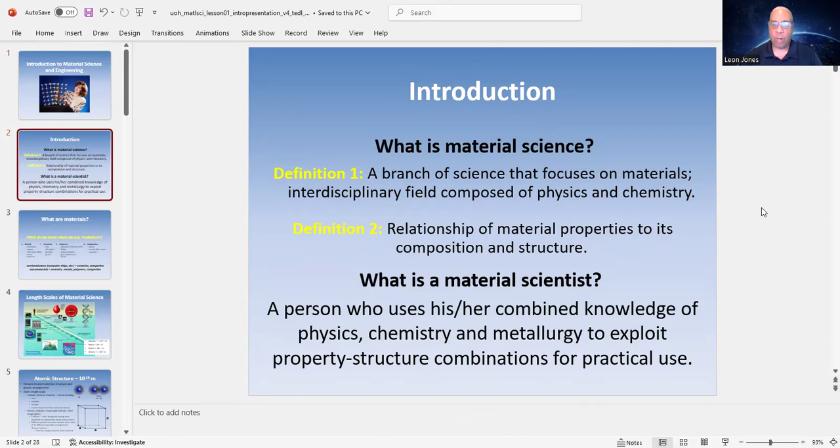To start everything off, the introduction. What is material science? It's a branch of science that focuses on materials. It's an interdisciplinary field composed of physics and chemistry, and it relates material properties to composition and structure. So what is a materials scientist? It's a person who uses his or her combined knowledge of physics, chemistry, and metallurgy to exploit property-structure combinations for practical use. Think about that.

Now, what are materials? We have a few of them. We have metals, used in mechanical engineering and civil engineering: aluminum, copper, steel or iron alloy, nickel, and titanium. We get into ceramics: clay, silica glass, alumina, and quartz. And we get into polymers. You're going to hear this term if you work in construction: polyvinyl chloride, PVC. What uses polyvinyl chloride? PVC pipe.

Then we have Teflon, various plastics. What about adhesives? Glue is an adhesive. And for individuals in combat, Kevlar helmets. Getting back to my field of civil engineering, composites: wood, carbon fiber resins, and concrete. Materials are in a number of branches of engineering, but you also have semiconductors, computer chips, which equal ceramics and composites, and nanomaterials, which equal ceramics, metals, polymers, and composites.

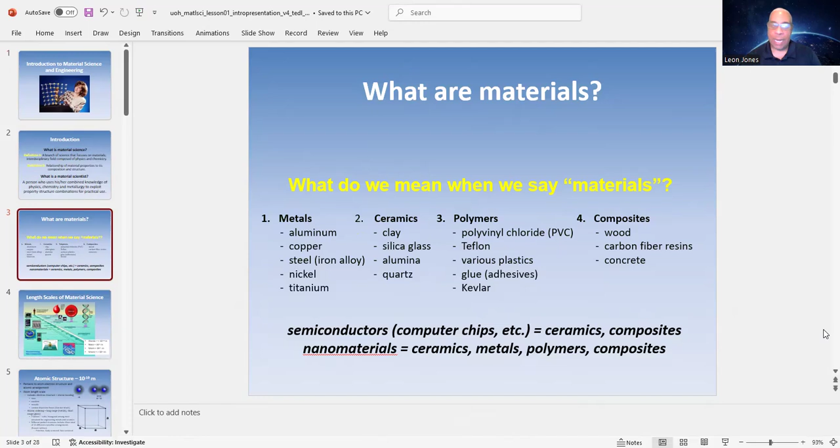So the length scales of material science. Something you need to know: atomic is less than 10 to the negative 10 meters. Nano, 10 to the negative 9 meters. Micro, 10 to the negative 6 meters. And macro, 10 to the negative 3 meters. When I say anything to a negative power, that means 1 over that number. Like 10 to the negative 3 is 1 over 1,000.

As you look at what's in materials, you have atomic handwriting, a bio motor, nanoshells, a quantum corral, nanostructure, a medication delivery system, a nerve chip. You have a man standing 6 feet tall. Then you have your DNA, a helix, and your blood cell. This is what materials are tied to.

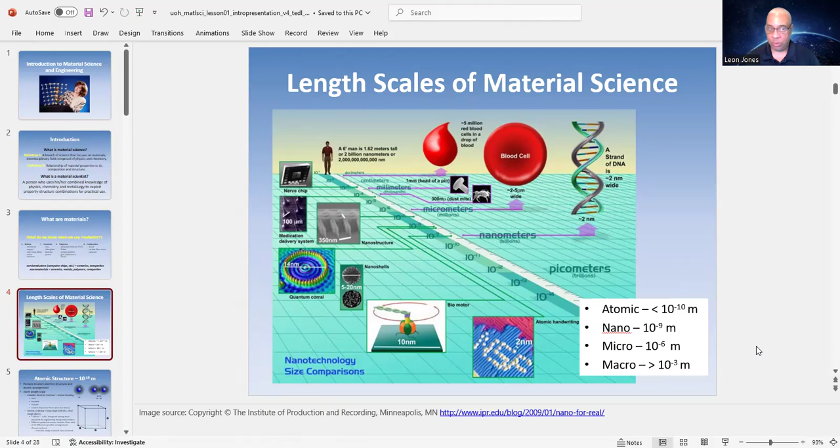Very, very small. Now, when we talk about our atomic structure, we're talking about 10 to the minus 10. It pertains to atom electron structure and atomic arrangement. Atomic length scale, which includes electron structure and atomic bonding. So this is what I mentioned earlier. You have your ionic, your covalent, your metallic, and your London dispersion forces, which is van der

Waals. Then you have your atomic ordering: long-range, metals; short-range, glass. We have 7 lattices, cubic and hexagonal among the most prevalent for engineering metals and ceramics. Then you have different packing structures, and the inclusion gives you a total of 14 different crystalline arrangements, your Bravais lattices, your primitive, your body-centered, and face-centered.

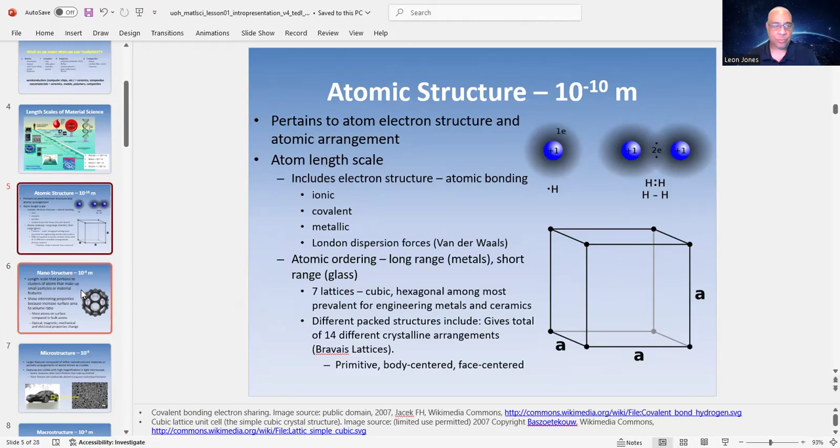And this is where you start getting into your chemistry right here. This is right here, 1e. What is 1e? It means it's 1 electron. 2e, 2 electrons. We get into the 10 to the negative ninth length scale that pertains to clusters of atoms that make up small particles or material features. They show interesting properties because of the increase in surface area to volume ratio. So what happens is you have more atoms on the surface compared to bulk atoms.

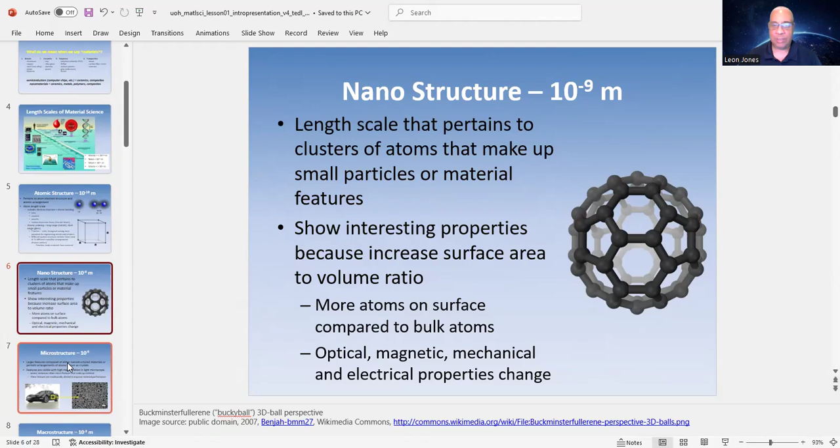And then we start to get into things you see with your eyes. We deal with optical, magnetic, mechanical, and electrical property changes. And this is under the nanostructure. Then we have your microstructure, 10 to the negative 6. Larger features composed of either nanostructured materials or periodic arrangements of atoms known as crystals. Features are visible with high magnification in a light microscope.

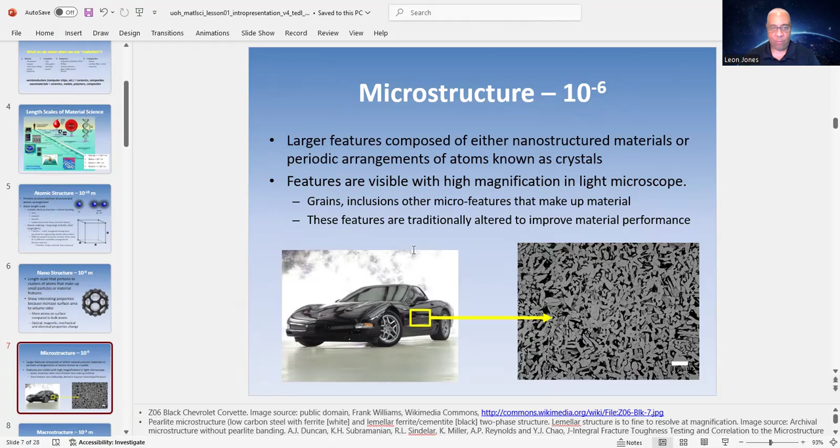Grains, inclusions, other microfeatures that make up the materials. These features are traditionally altered to improve performance. You find that in cars. You'll see that you'll have it in this car. Then we have our macrostructure, 10 to the negative third, which pertains to collective features on the microstructure level. Grain flow, cracks, porosity are all examples of macrostructure features. Now, where's another place that you see the word porosity? Well, you see it in fluids and you also see it in soils.

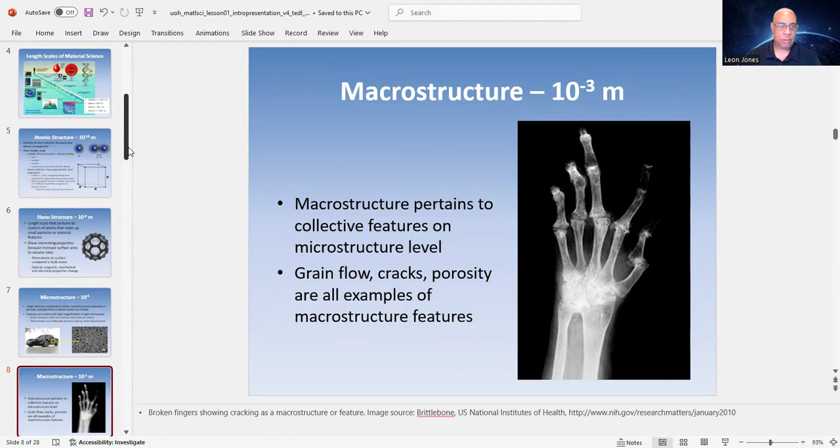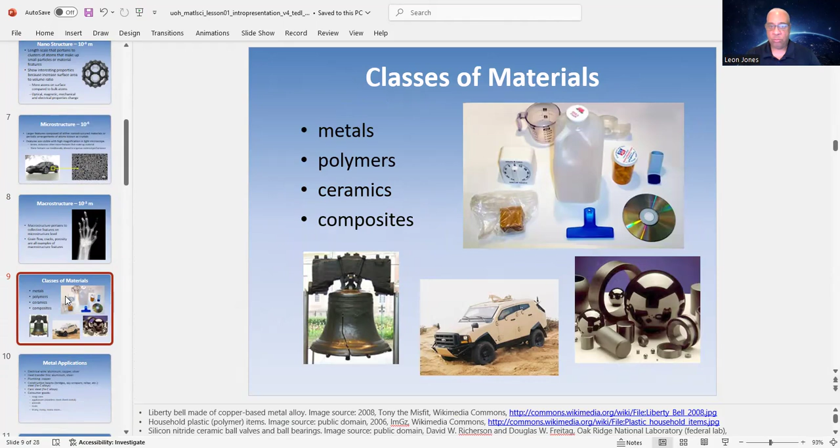Then we have all that. Let's get into the classes of materials. We have your metals, your polymers, your ceramics, and your composites. And again, these materials are used for everyday items that we use, like milk cartons, scales, cars. And we have our material applications: electrical wire, aluminum, copper, silver; heat transfer fins, aluminum, silver; plumbing, copper; construction beams used for bridges, skyscrapers, rebar, etc.

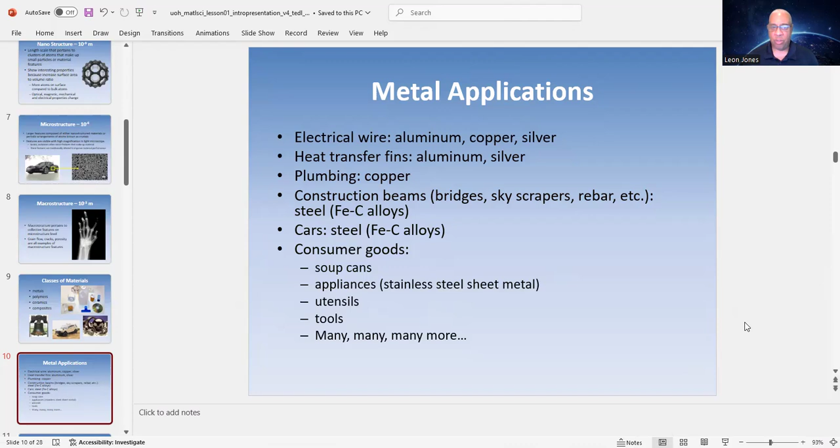Steel, Fe-C alloys; cars, steel, Fe-C alloys; consumer goods, soup cans, appliances, stainless steel sheet metal, utensils, tools, and of course, many more. And for the metals, metals consist of alkaline earth, metalloids, and transition metals. So basically, metal alloys are mixtures of 2 or more metal and non-metal elements. For example, aluminum and copper, copper and nickel, alloy steel.

We have our bonding, metallic bonding. No particular sharing or donating occurs. An electron cloud is formed, that is, free electrons. Strong bonds with no hybridization or directionality. Then you have your properties. Electrically conductive, free electrons; thermally conductive; high strength, large capacity to carry load over cross-sectional area. You deal with stress. Ductile, endures large amounts of deformation before breaking.

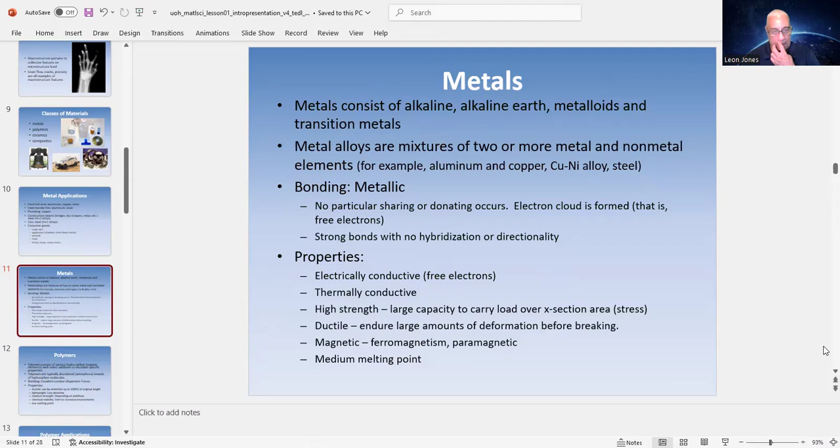Then we have magnetic, ferromagnetism and paramagnetic. Then we deal with the medium melting point. Polymers consist of various hydrocarbon organic elements with select additives to elucidate specific properties. Polymers are typically disordered, amorphous strands of hydrocarbon molecules. Bonding: covalent, London dispersion forces, and we have our properties.

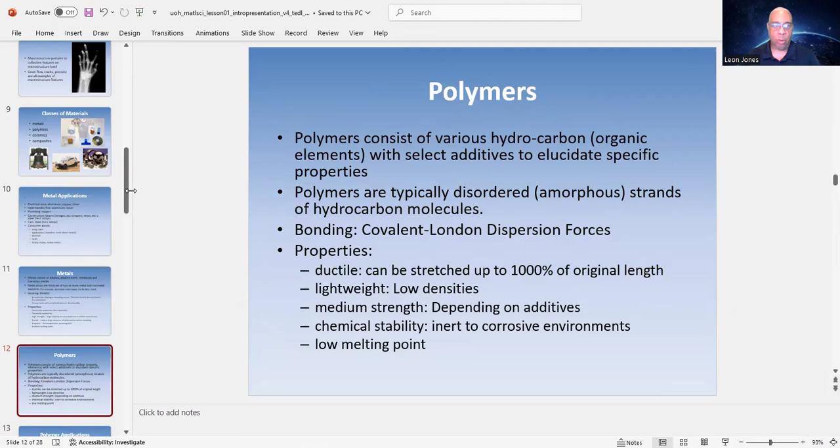Ductile, can be stretched up to 1000% of original length. Lightweight, features low densities. Then we have medium strength, depending on additives. Chemical stability, inert to corrosive environments, and a low melting point. Polymer applications: car tires, vulcanized polymer, added sulfur; Ziploc bags, food storage containers, plumbing. When I told you about PVC, well, this is where the pipe comes into play.

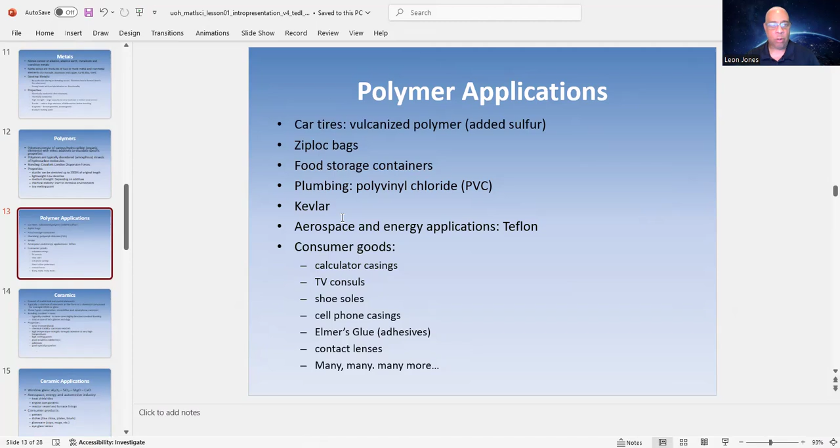Polyvinyl chloride, PVC; Kevlar, aerospace and energy applications; Teflon; consumer goods, calculator casings, and here's an example of a calculator casing. TV consoles, shoe soles, cell phone casings, Elmer's glue, which is an adhesive, contact lenses, and many more. Ceramics consist of metal and non-metal elements, typically a mixture of elements in the form of a chemical compound.

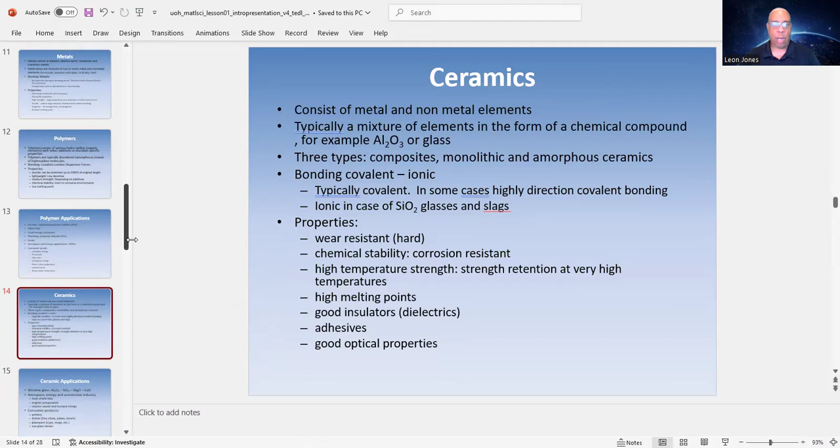Then we have our properties: wear resistant, hard, chemical stability, corrosion resistance, high temperature strength, strength retention at very high temperatures, high melting points, dielectrics, which are good insulators, adhesives, good optical properties. The applications, or we call them ceramic applications: window glass, Al2O3, SiO2, MgO, CaO, calcium oxide, magnesium.

How many of you all have done pottery? Well, you know, pottery is a ceramic. What about dishes? Fine china, plates, bowls. What about glassware, cups, mugs, etc.? And these eyeglass lenses.

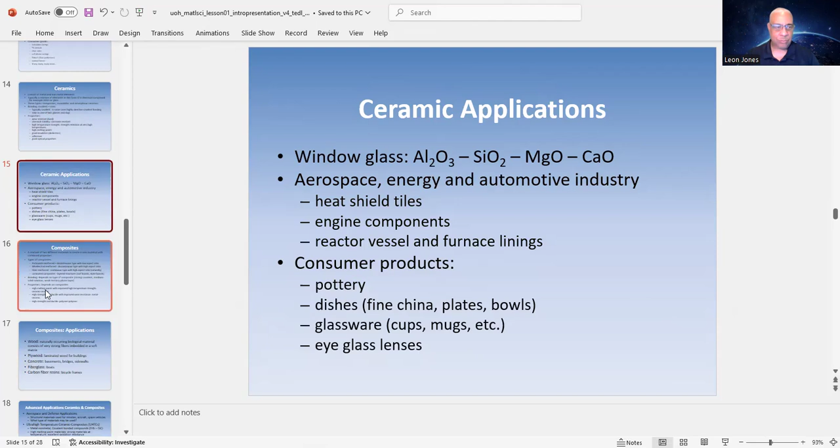Composites. Well, it's a mixture of two different materials to create a new material with combined properties. Types of composites: particle reinforced, discontinuous type with low aspect ratio; whisker rod reinforced, discontinuous type with high aspect ratio; fiber reinforced, continuous type with high aspect ratio, naturally. Laminated composites, layered structures, surfboards, skateboards.

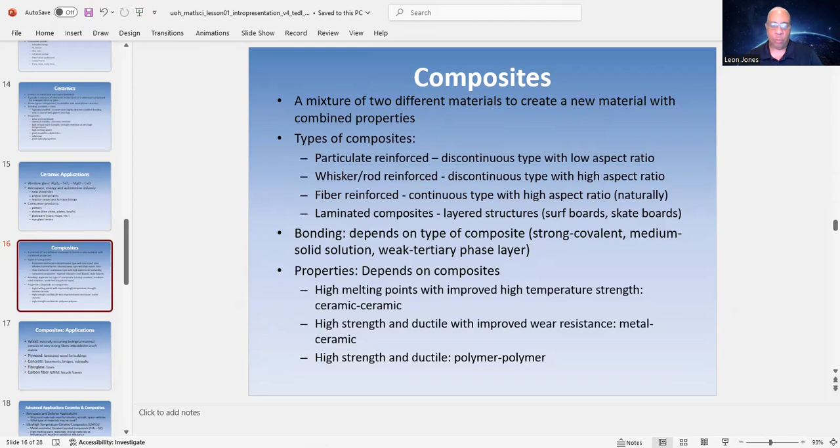Now the bonding depends on the type of composite: strong covalent, medium solid solution, weak tertiary phase layer. Then we have our properties. Just depends on the composite. High melting points with improved high temperature strength, ceramic. High strength and ductile with improved wear resistance, metal ceramic. And we have high strength and ductile, polymer.

Now the composites, one of my favorites because I work in construction. Wood, naturally occurring biological material that consists of very strong fibers embedded in a soft matrix. Plywood, laminated wood for buildings. Concrete, you use concrete for basements, bridges, and sidewalks. Fiberglass, boats. Carbon fiber resins, you can use that for bicycle frames.

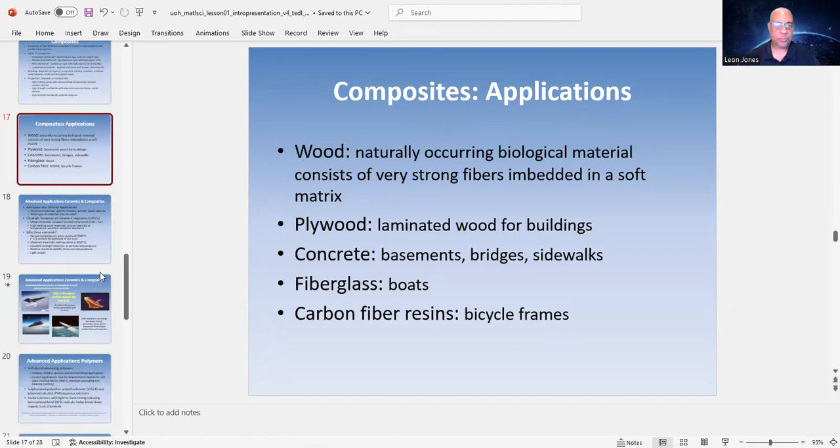Advanced applications, ceramics and composites, aerospace and defense applications. So basically, these are structural materials used for missiles, aircraft, space vehicles. What type of materials may be used? Well, you have ultra high temperature ceramic composites, metal, non-metal, covalent bonded compounds, high melting point materials, strong materials at temperature, excellent oxidation resistance.

Why these materials? Service temperatures are in excess of 2,000 degrees Celsius, 1/3 surface temperature of our sun. Also, materials have high melting points, which are greater than 3,000 degrees Celsius. Excellent strength retention at service temperatures, relative chemical stability at service temperatures, and also lightweight.

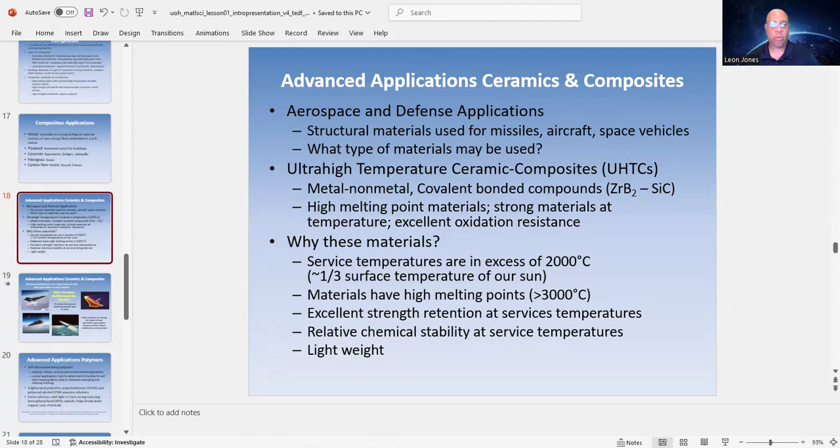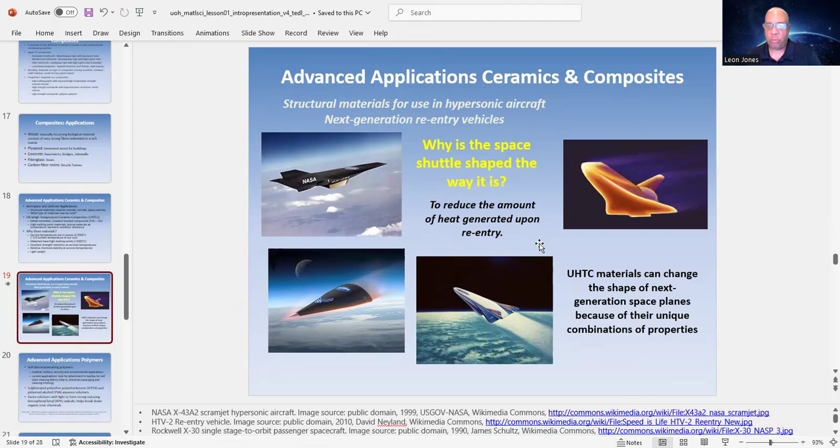Advanced applications for ceramics and composites, structural materials in use for hypersonic aircraft, next generation reentry vehicles. Why is the space shuttle shaped the way it is? To reduce the amount of heat generated upon reentry. And when we talk about reentry, that is from the ozone, the atmosphere. Also, UHTC materials can change the shape of the next generation space planes because of their unique combinations of properties.

Advanced application polymers, self-decontaminating polymers. Well, they're in medical, military, security, and environmental applications. Current applications. So basically, you look for attachment to textiles for self-toxin cleaning fabrics. That is chemical scavenging and cleaning clothing. Then we have our sulfonated polyether ether ketone, or we call it SPEEK, and of course our polyvinyl alcohol PVA aqueous solutions.

Not bad on the pronunciation. If you are in the health field, you can definitely pronounce those words, but you know you're dealing with chemistry.

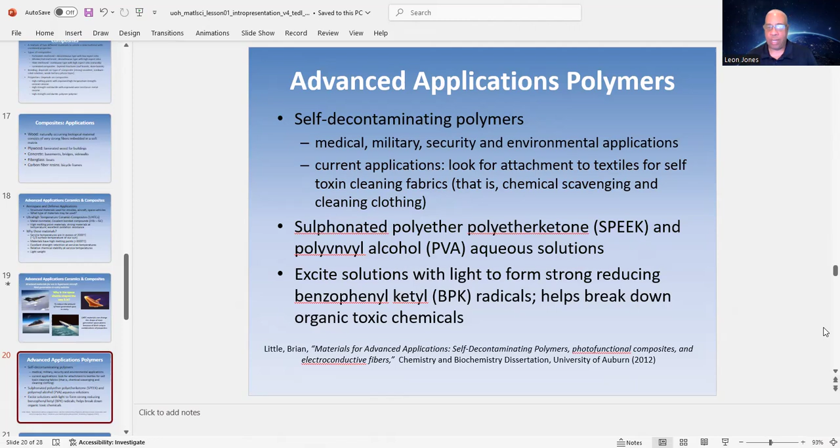And then we get into our excited solutions with light to form strong reducing benzophenyl ketyl BPK radicals, which helps break down organic toxic materials.

Advanced application metals, hydrogen absorbing metal alloys for energy transportation or batteries. So you have your electrolyzed hydrogen from water. Fuel cell technology can be stored in tanks fabricated with hydrogen absorbing metal alloys. Then you have your nickel metal hydride. Batteries use the same principle, but to improve battery self discharge. Volume density is significantly higher than gaseous hydrogen, and more hydrogen per tank.

Then we have our typical alloys. They consist of all of these chemical compounds that you see. Mn, Ti, V, Mg, Ni, which Ni I know is nickel, Cr. Mn I know is probably, I believe Mg is magnesium. La, Ni, like I said, Ni is nickel. Then you have BCC metals. They show higher storage and desorption properties. Some metals can absorb gas densities equivalent to liquid hydrogen densities.

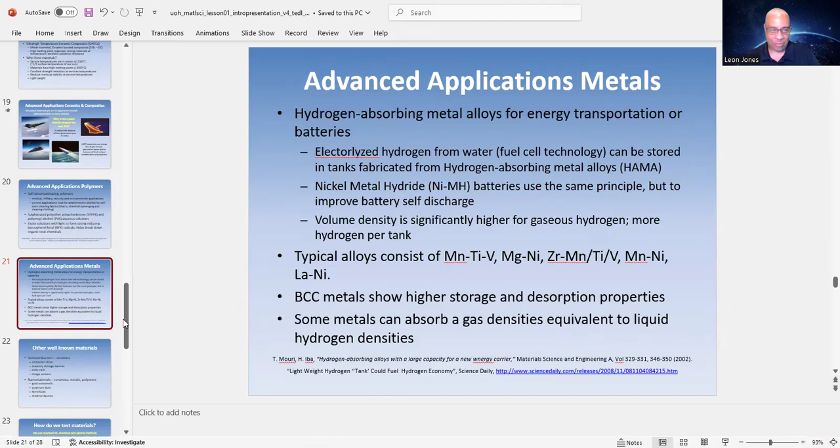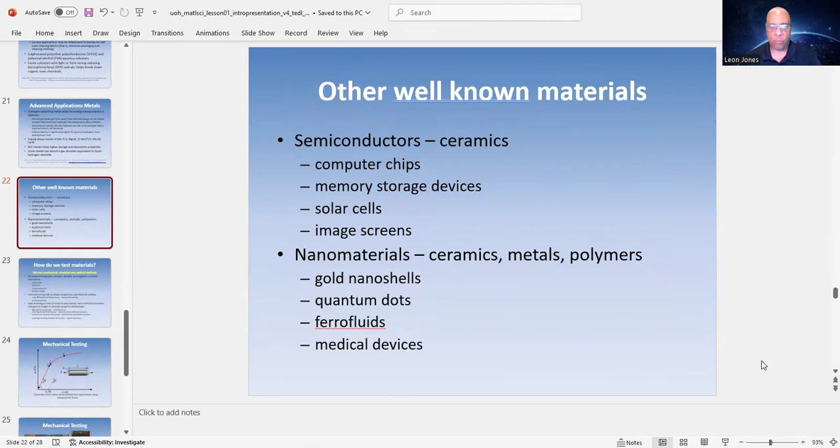Other well-known materials, semiconductors, ceramics, computer chips, memory storage devices, solar cells, image screens, nanomaterials, ceramics, metals, polymers, gold nanoshells, quantum dots, ferrofluids, medical devices. Now, how do we test the materials? We use mechanical, chemical, and optical methods.

Mechanical testing gives strength, ductility, and toughness material information. So this is where, because I work in construction, I use some of these tests: fracture testing, compressive test, bend test, tensile test. Now, chemical testing tells us about the composition and chemical stability, X-ray diffraction and fluorescence, composition testing, corrosion testing.

Then you have optical testing, which is more of a way to view atomic, nano, and microstructures. And it also gives us insight to structure property relationships, like light optical microscope for microstructure, scanning electron microscope, microstructure and nanostructure, transmission electron microscope, nanostructure and atomic structure, scanning tunneling electron microscope, atomic structures.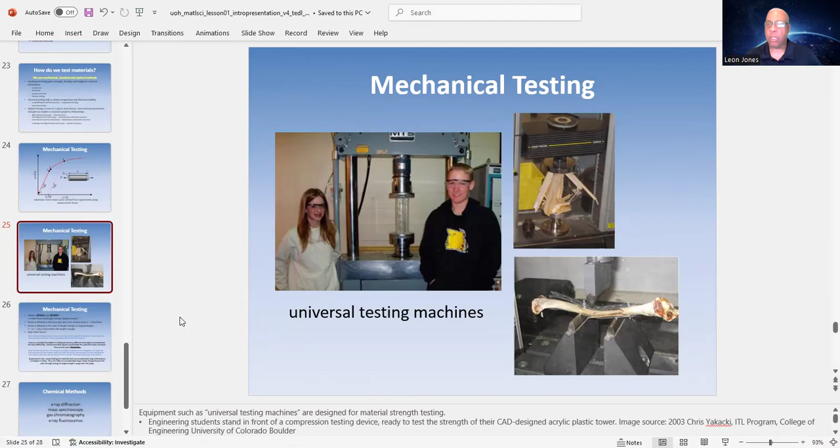Mechanical testing. What is stress and strain? It is like forces and length change. It's known as displacement. That's when your forces and your lengths change. Stress is defined as the force per unit cross-section area. S equals force divided by area. Strain is defined as the ratio of length change to original length.

So I said your big E is your elastic, and your little epsilon, that's your strain. And here is the formula. Now, why use these terms?

Stress scenario. So basically, if I apply a force on an eraser of a pencil and apply the same force on a tabletop, how does each material behave? Can you distinguish which material is stronger? Force as a strength description is inadequate because different sized objects accommodate the force differently. So just because both objects can handle the same force does not mean they are the same strength.

Strain scenario. If I pull on a 1-inch long piece of taffy and apply the same pulling force on a piece of 2-inch long putty, and both have equal diameters, with the taffy and putty stretching the same distance, what does it say about the two materials? They both stretch the same distance.

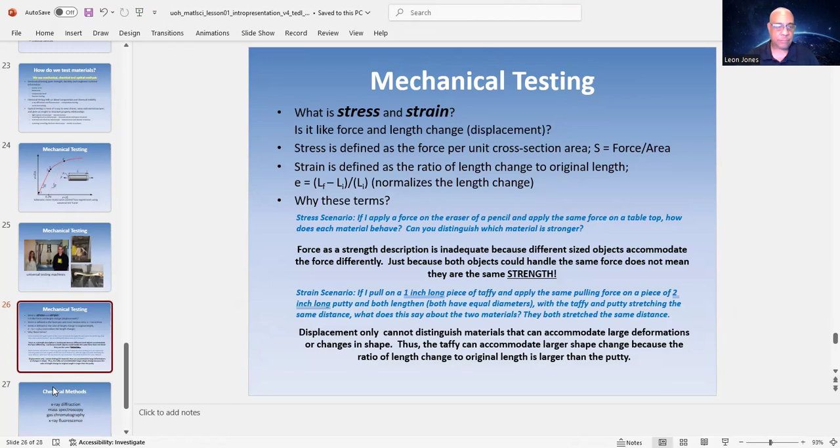Chemical methods: X-ray diffraction, mass spectroscopy, gas chromatography. So we have X-ray diffraction, mass spectroscopy, gas chromatography, and then we have our X-ray fluorescence. X-ray diffraction, mass spectroscopy, gas chromatography, and then we have our X-ray fluorescence. Very good pronunciation.

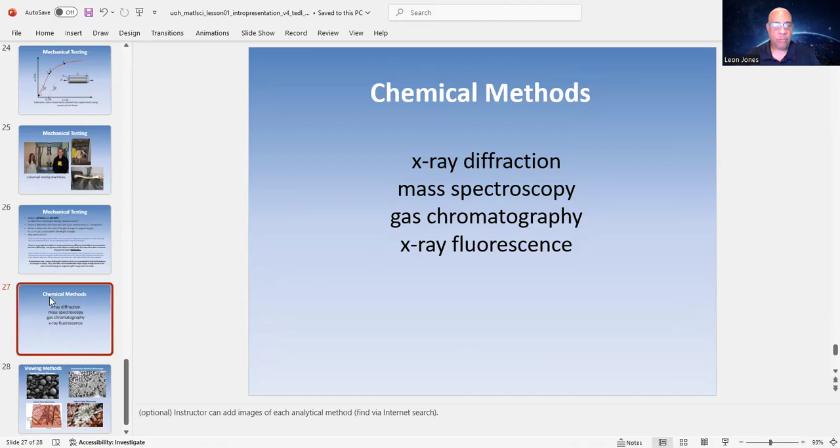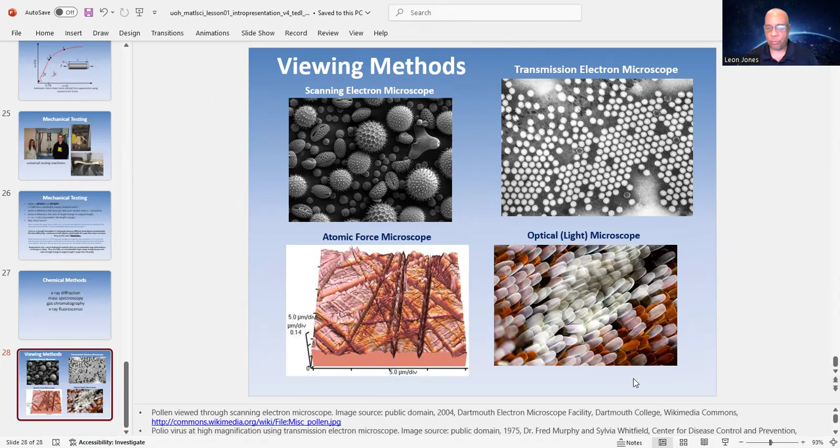And then last but not least, here are our viewing methods. So when you deal with chemistry, you're going to be looking at materials through a microscope. So you have the scanning electron microscope, the atomic force microscope, optical light microscope, and your transmission microscope. But the materials that you've seen are used in our everyday products. And if you're in engineering, those materials are used over all branches of engineering.

Now, you must understand that engineering is made up, before the math comes into play, of three branches of science. And what are they? Physics, chemistry, and biology. And then the math is just to give you the theory. But once you get into theory, then you get into the application. Now, what's involved with the application? That's the testing. And again, materials have to be tested to make sure that they're workable, they're durable.

We also have to make sure that we understand the cooling and the heating process of materials. That's why material science is very important. And we're talking about all materials. You know, even when you are baking bread, what material are you using? You're using flour, water, yeast. It's a material. And when you start getting into the thermodynamics part, then you start getting into the convection and the conduction part as well. And when we start to deal with temperatures, we get into Kelvin and Rankine.